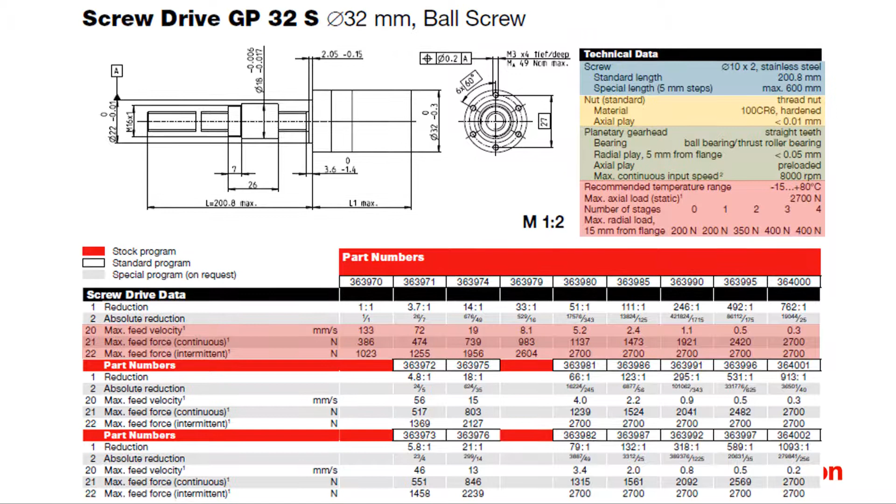On top, one finds information about the screw type, the nut and the gearhead. The lower part of the spindle drive datasheet shows parameters that are mainly depending on the number of gearhead stages used. An important one is the overall efficiency.

It depends on the number of gearhead stages and the screw type used. It's highest on ball screws. Another parameter is the mechanical positioning accuracy. More about this a little bit later as well.

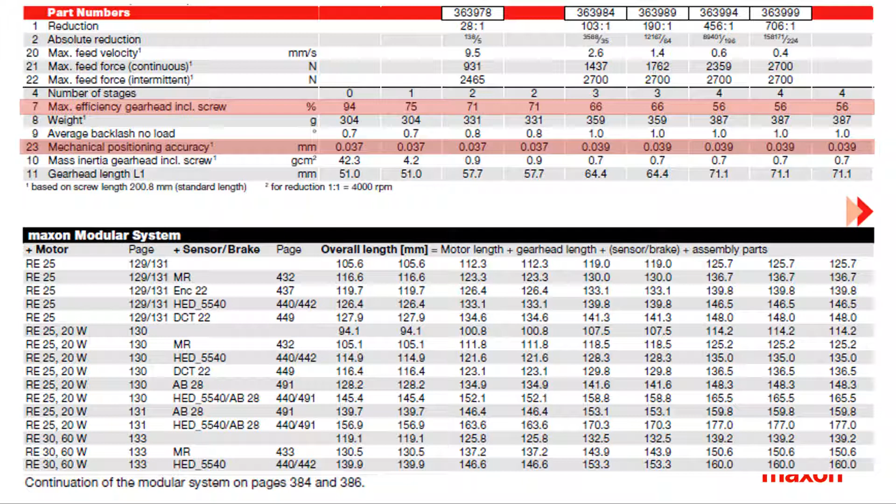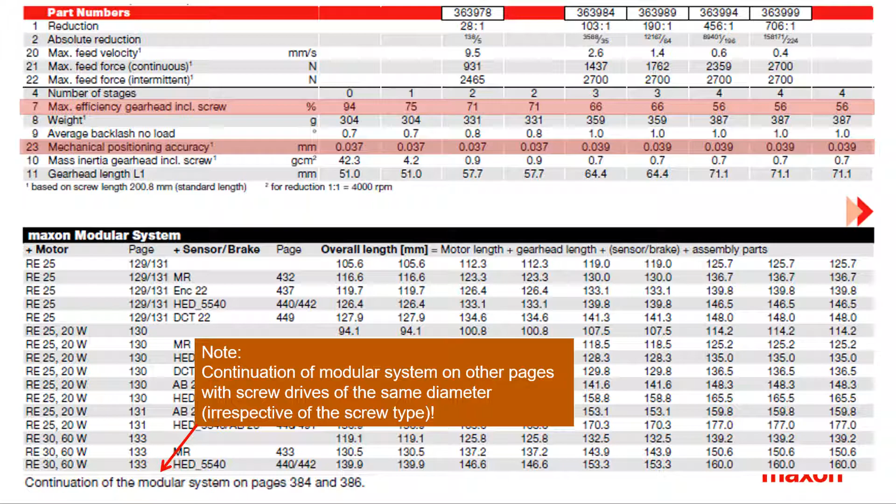The bottom of the page shows the maxon modular system with possible motor and sensor combinations. This list is continued on the catalog pages of the other spindle drive based on the same gearhead diameter.

We return to the maximum feed forces. As mentioned already, they are related to life expectancy considerations and are given for maximum gearhead output speed. In spindle drive, these feed forces may stem from different origins, from gearhead torque limitations, from axial bearing load limitations, from axial forces on the nut.

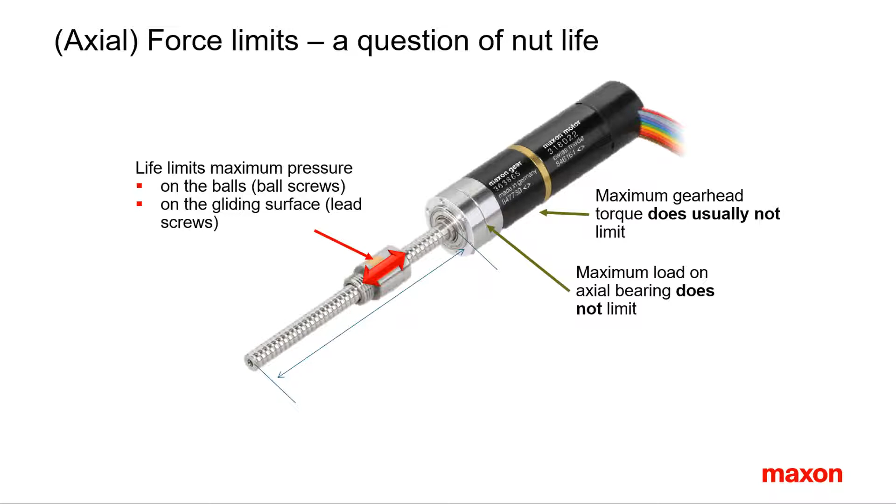As a rule, the gearhead torque, the axial bearing, are not the force limiting factor. Most of the time, it's the maximum force on the nut screw contact. It is calculated from life expectancy consideration taking into account the maximum gearhead output speed.

Remark: for very low gearhead reduction, it is often the motor torque that limits the feed force of the whole unit. A last limitation may stem from the maximum axial compression force of the screw.

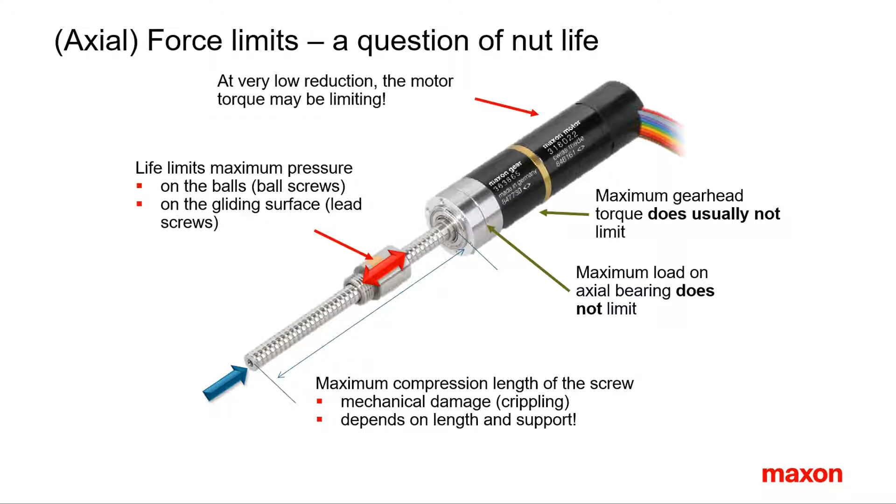For very long screws, the screw can start to bend and buckle. An additional support at the screw end can help to avoid this.

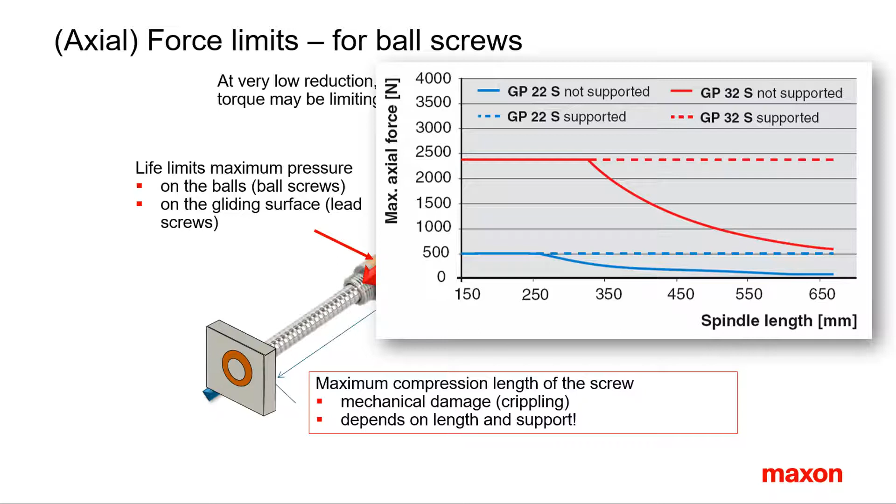This excerpt from the spindle data explanation shows that essentially the same limits apply to feed forces as with gearhead torques. Intermittent operation at high forces should not exceed 1 second. High loads must not be applied during more than 10% of operation.

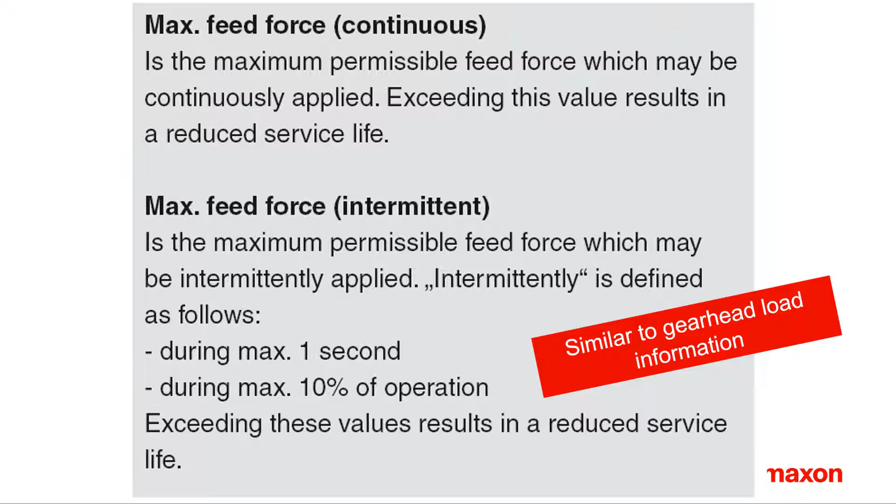The catalog data suggests that the operating ranges of spindles as well as of gearheads look very simple. They can be represented as rectangular fields in the velocity versus force diagram.

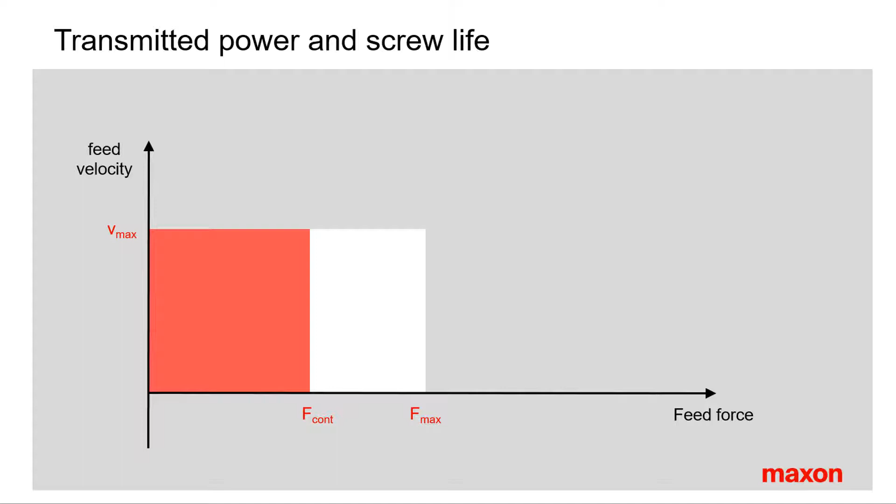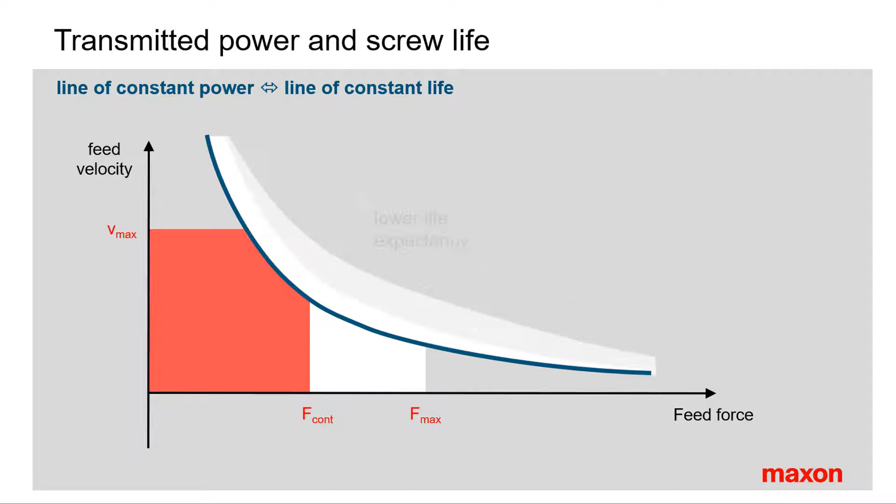Experiences and life testing experiments show, however, that spindle life is essentially a matter of the mechanical power transmitted. A line of constant power corresponds to a line of constant life. Exceeding this power will reduce the expected life. Staying below this power results in a higher life.

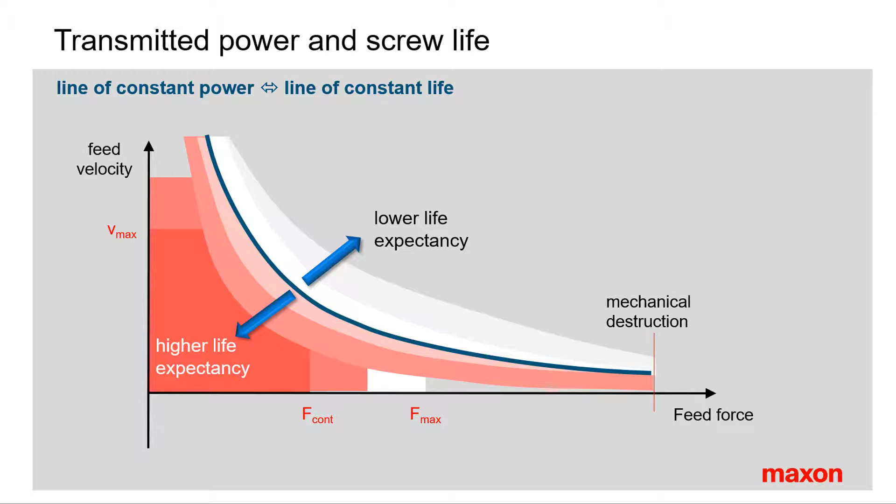This revised operating range diagram also shows that higher feed forces and velocities are possible as long as the power remains sufficiently low. It's all a question of gaining or losing life, and at some rather high forces, a question of mechanical destruction.

The speed limit can stem from maximum speed of the ball return systems of the spindle nut. This is particularly important for high rotational speeds of the screw, as can occur on low gearhead reduction ratios.

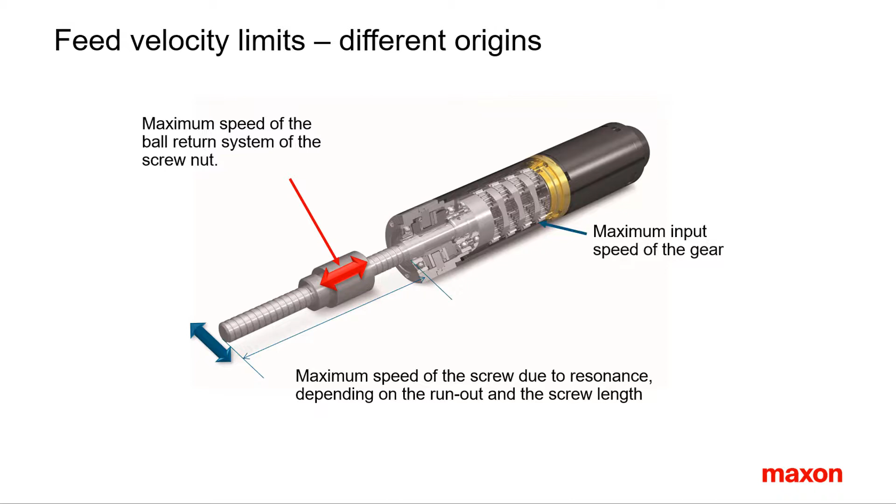Or, high speed limit can stem from the maximum speed of the spindle due to resonance oscillation. They depend on the runout and the length of the spindle, particularly important on long and thin screws. But most of the time, it's the maximum input speed of the gear that limits the linear feed velocity.

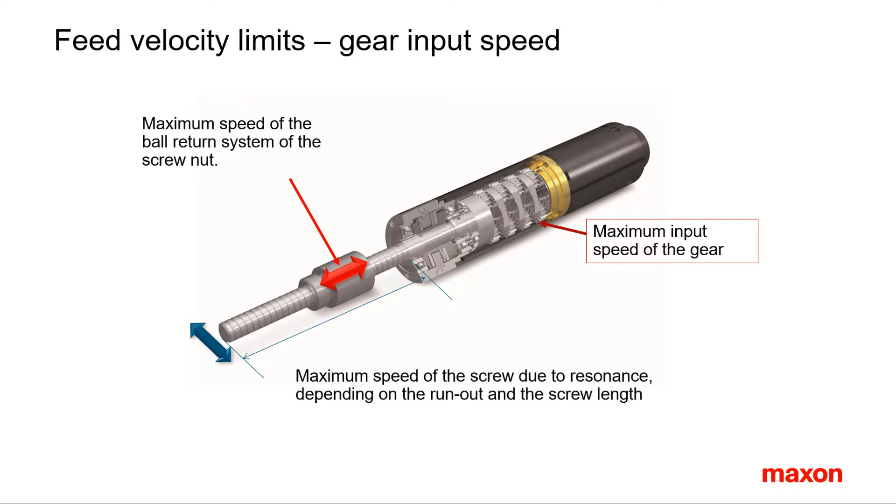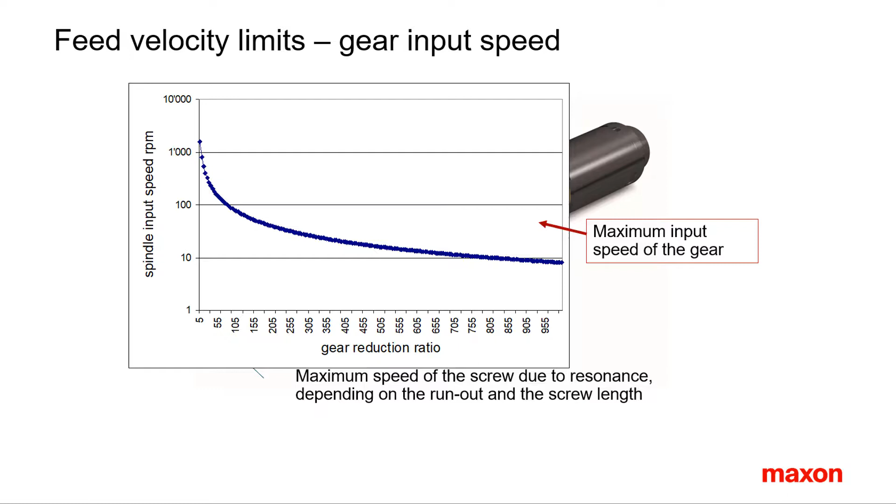The mechanical position accuracy has three major contributions. The general tolerance of the screw. The tolerance class of our ball screw supplier is C5 or IT5. It is about 20 to 30 microns for our standard spindle length. This is an absolute tolerance and has no influence on repeatability.

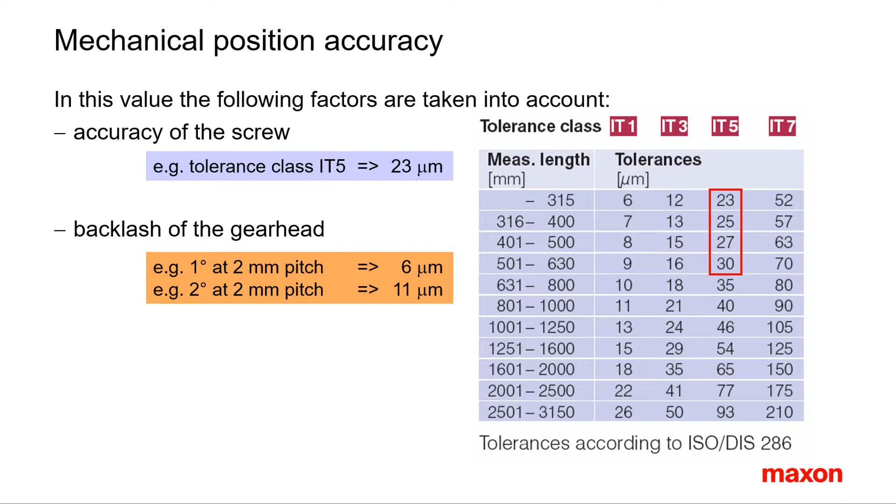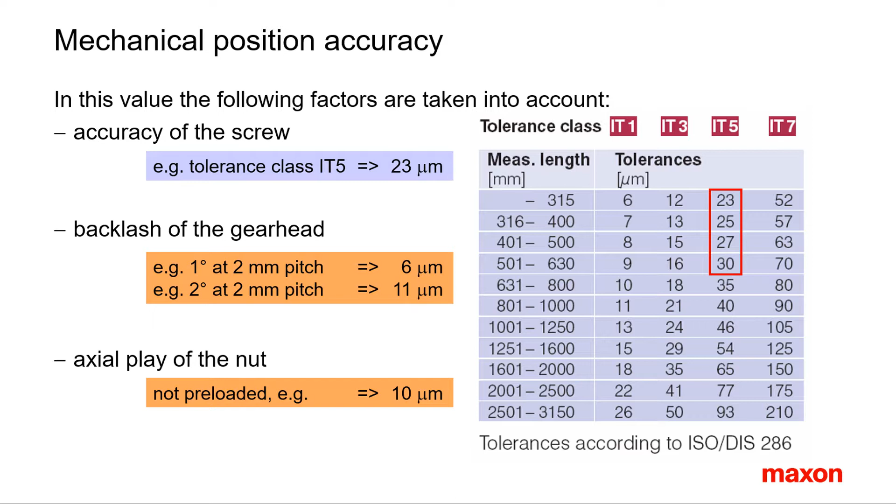The second contribution is the backlash of the gearhead, typically adding another 10 microns. The last contribution stems from the axial play of the nut. Preloading the nut can improve the repeatability, but zero play is not possible due to the gearhead backlash.

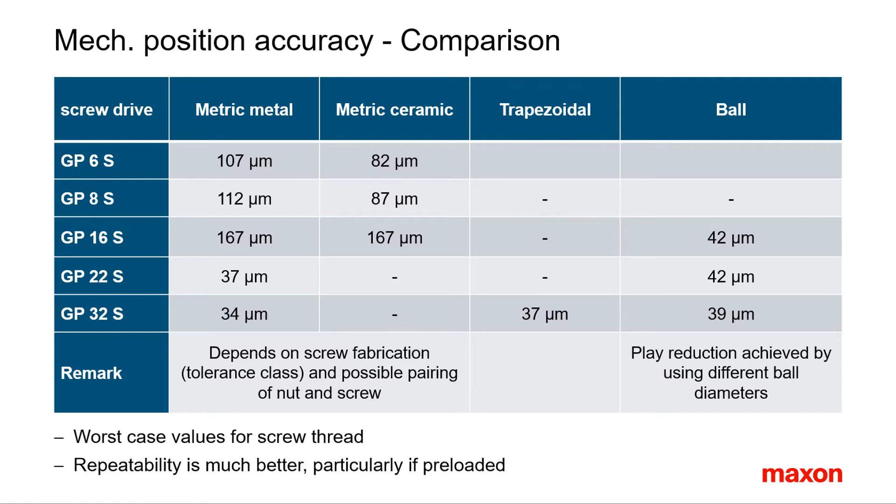Comparing the position accuracy parameters in the catalog, one remarks very large values on the metric spindles of GP8S and GP16S. These values are based on worst-case consideration and reflect mainly the tolerance class of the screws. Repeatability is much better.

I hope this presentation helps you understand the meaning of the most important maxon spindle drive parameters.